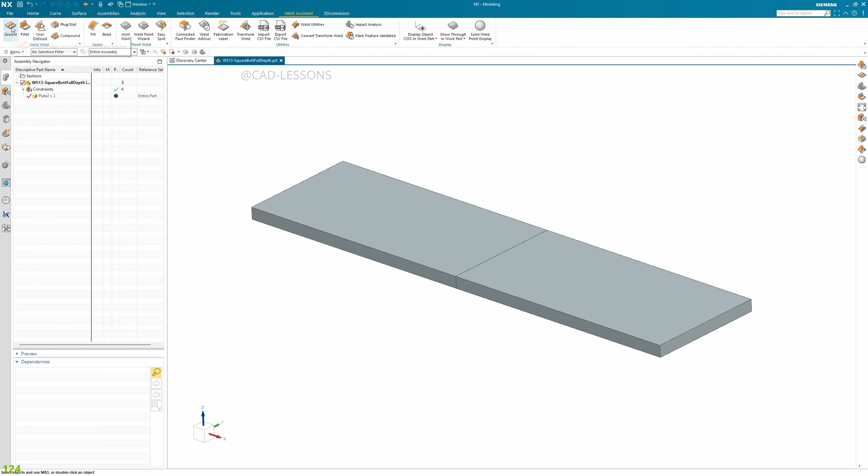In the groove weld, I'll just reset to ensure everything is done from scratch. Select the square butt, and this is the edge preparation I was talking about. In my case, you can clearly see the edges are in contact with each other for both the plates, so I am going to consider that edges are not prepared. But in case you have already prepared the edges for welding, then you can select here prepared.

In that case, if it is a butt weld, then probably you will see the gap between two plates where the weld should be filled, and if it is a V groove, then there should be a taper cut on both ends of the plate to fill the weld. So in my case, not prepared.

And how do I want my system or NX to prepare the edges for the entire length? For edge selection, there are other options, like you can specify the limits so that not the entire edge would be selected for preparation, and there are more complex options. Most of the time you will be fine with the existing edges not prepared.

So let's move on. For square butt, select the first face, go to the next selection, select the second face, and if you just click OK, you will be done with the default values. But here the default values are root opening 3, depth 3. For my sheet thickness, it would not be okay. Let's see the result. It would be a very small weld here.

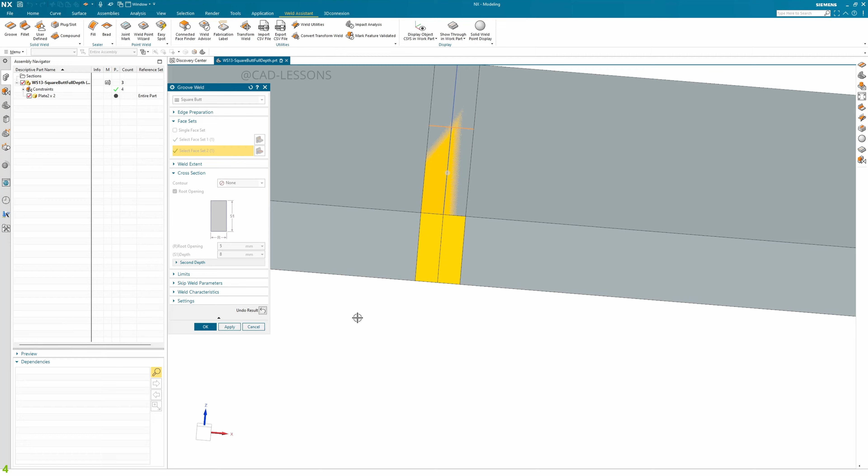My sheet thickness is 8 millimeters, so accordingly I need a root opening of at least 5 millimeters. Depth would be 8 millimeters. Show result. Yeah, that's fine for me. Now once again, if you want, you can assign weld PMI to this weld as well. I'm not going to do that because we are going to see another weld here on the same sheet.

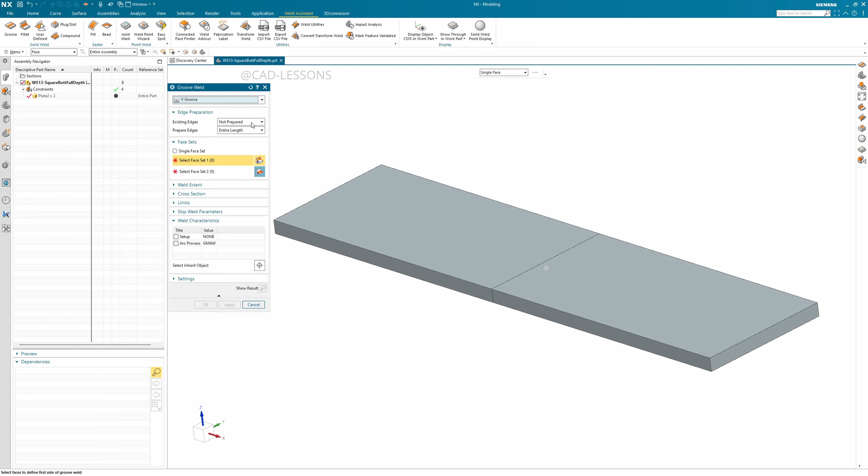Click reset once again, not the square butt. Now we are going to go for V groove. Similarly, edges not prepared, first set, middle click, second set, then the cross section, root opening. I need the root opening to be, let's see, 3 millimeters. Depth, it's okay for me. The angle you can change here, but for me 45 degrees is okay.

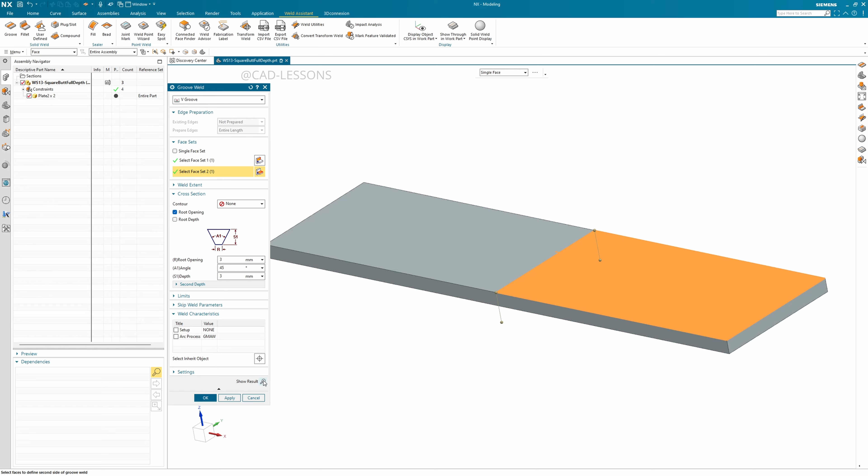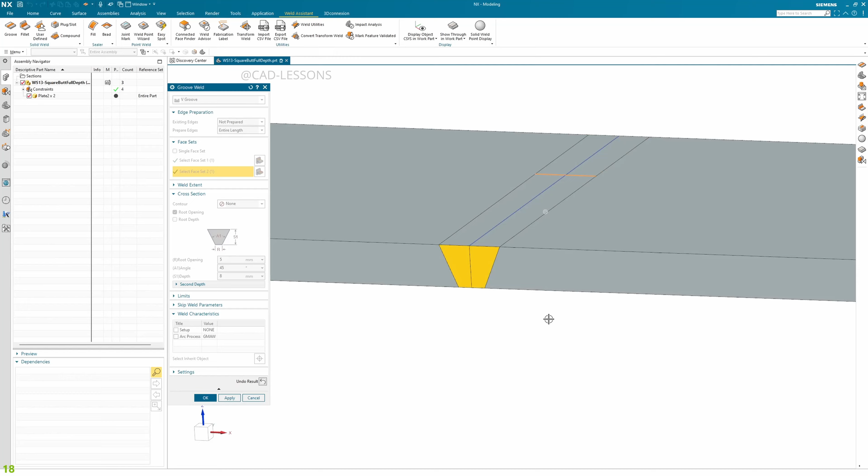If you want to just have a look at how it's going to look, just click on preview and see how it's going to look here. So 3 millimeter depth is not okay for me. For 8 millimeters of sheet thickness, let's take this 8, root opening, let's say 5. This is how it's going to look. This is the root opening, angle, and the depth.

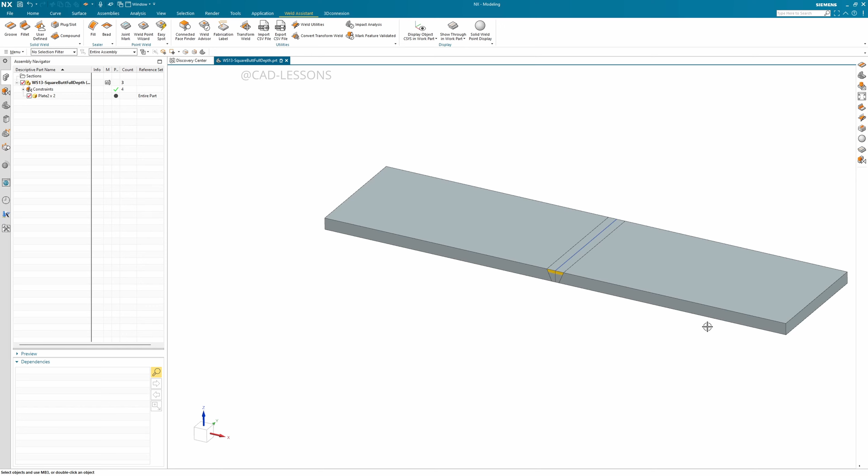So this is your V groove weld with the custom parameters if the edges are not prepared. Again, if you want to add PMI to it, you can do so by clicking on it, but I'm not going to do that. By clicking OK, my weld will be created here. So that's it for today.